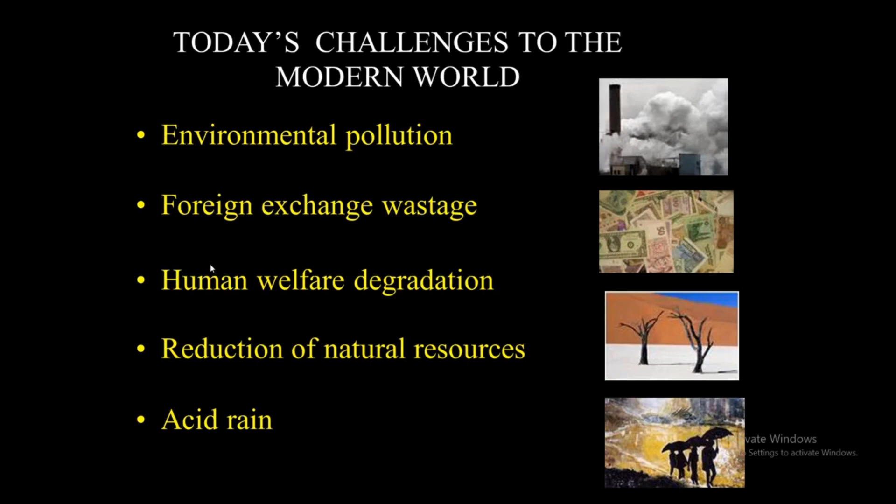Environmental pollution, foreign exchange wastage, human welfare degradation, reduction of natural resources, acid rain, energy deficiency, global warming, deforestation and desertification.

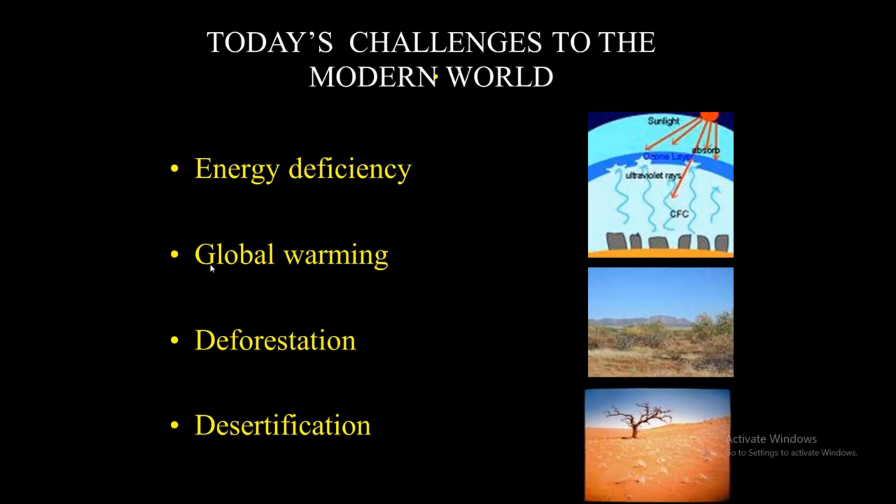One of the major challenges in front of us is energy deficiency. If any country wants to be in a developed position, it has to utilize as much energy as possible.

If we focus on the available energy resources, there are two sorts of energy sources: one is conventional energy resources, and another is new and renewable energy resources. Usage of conventional energy resources like petrol, coal and kerosene will yield loss of money as well as environmental pollution. Extracting coal, oil and gas is dangerous and polluting, and these fossil fuels are non-renewable.

As we use up easily accessible sources of coal, oil and gas, extracting them becomes harder, more expensive and more dangerous. Burning fossil fuels for both heating and fuel for vehicles is the main source of greenhouse gases like carbon dioxide and others, which affect the atmosphere and are altering the climate.

While the Paris Agreement marked significant recognition of the efforts needed to reduce global CO2 emissions to near pre-industrial temperatures, the UN Program Report 2019 remarks that greenhouse gas emissions will need to fall drastically by 7.6% each year until 2030 to meet the targets of the agreement.

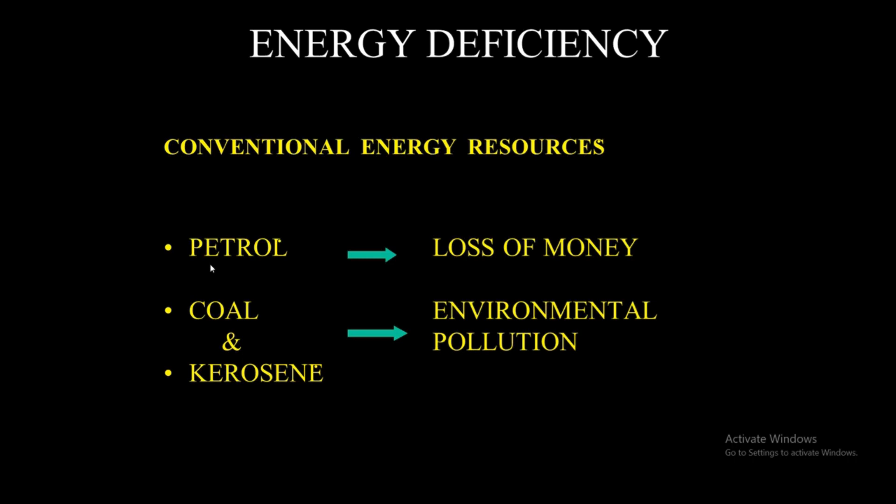Using renewable energy over fossil fuels has a number of advantages. Renewable energy technologies use resources straight from the environment to generate power. These energy sources include sunshine, wind, tides and biomass, to name some of the more popular options.

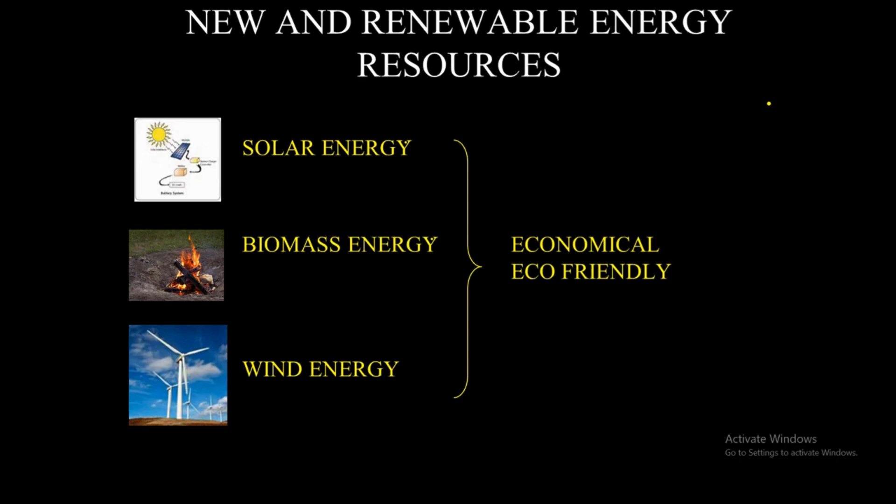Renewable resources won't run out, which cannot be said for many types of fossil fuels. As we use fossil fuel resources, they will become increasingly difficult to obtain, likely driving up both the cost and environmental impact of extraction. Renewables lower reliance on foreign energy resources.

Among these renewable energy sources, I am going to concentrate on bioenergy. What is bioenergy? The energy obtained from biomass is known as bioenergy or biomass energy.

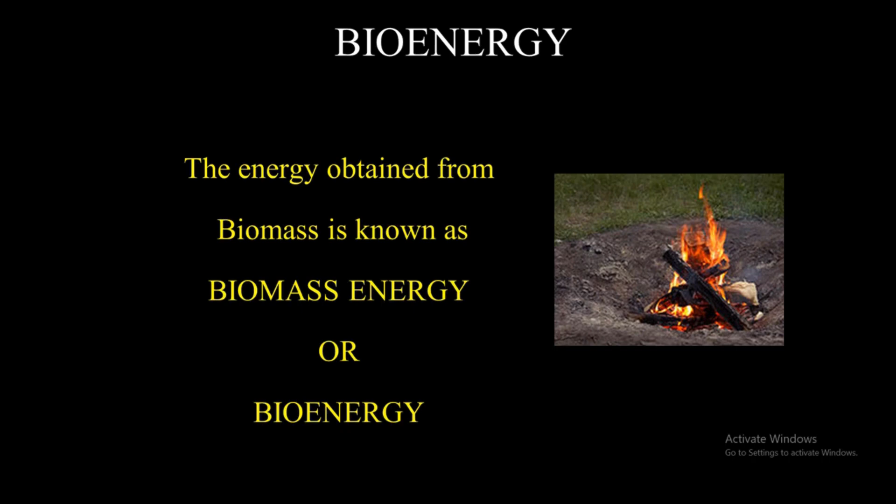Biomass is any organic matter, both living and dead, ranging from plants to organic waste. In most cases, biomass rich in oil or sugar is ideal for energy production. The term bioenergy refers to energy obtained from organisms, either living or dead. This does not include fossil fuels.

Now let us see the classification of biomass residues. Biomass residues can be categorized into 4 types: forestry biomass, agricultural biomass, energy crops, and municipal solid waste.

Forestry biomass can be categorized into 3 types: primary, secondary and tertiary. Trunks of fully grown trees fall under the category of primary forestry biomass.

Branches of big trees and trunks of small trees are under the category of secondary forestry biomass. The biomass derived after the processing of primary biomass is called tertiary forestry biomass.

The second category is agricultural biomass. Biomass from agricultural industries or agro-industrial residues are under the category of agricultural biomass, as well as dung of animals and poultry waste, which are also under this category.

Then we concentrate on the third biomass residue category, namely energy crops. Woody biomass producing species like bamboo, pine, switchgrass, etc., as well as starch producing species like root crops, etc., are all under the category of energy crops.

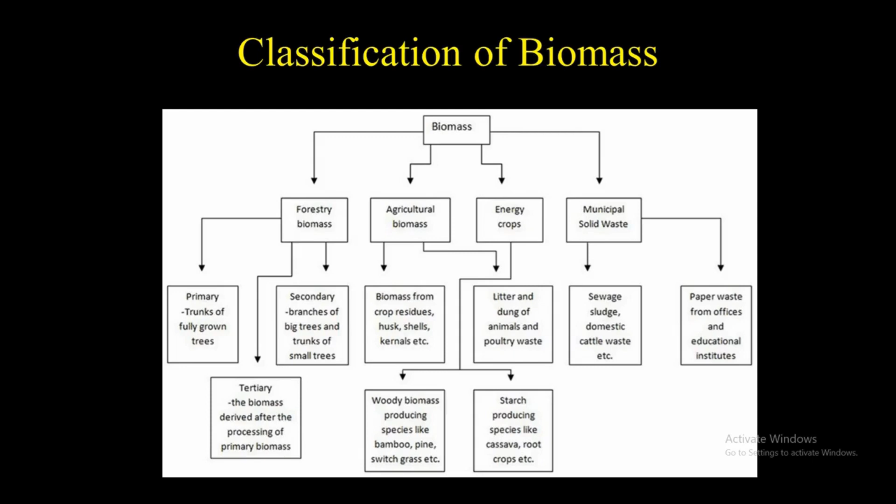Biomass contains stored energy from the sun. Plants absorb the sun's energy in a process called photosynthesis. When biomass is burnt, the chemical energy in biomass is released as heat. Biomass can be burnt directly or converted to liquid biofuels or biogas that can be burned as fuels.

These are the pictorial representations of woody biomass materials as well as agricultural and agro-industrial wastes.

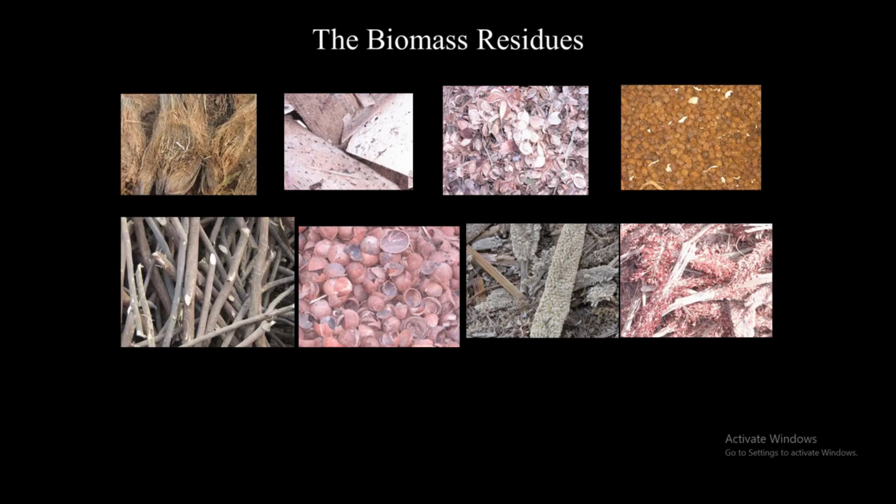Now let us see what is the technology behind converting this biomass residue into bioenergy. We have to utilize or adopt proper technology in order to use this biomass residue in an economical as well as environmentally friendly aspect.

As a physicist, we know the main law behind this technology is the law of energy conservation: energy can neither be created nor destroyed, but one sort of energy can be converted into another sort of energy. That is the main concept we are using in this technology. The available bioenergy can be converted into thermal, mechanical and then electrical energy.

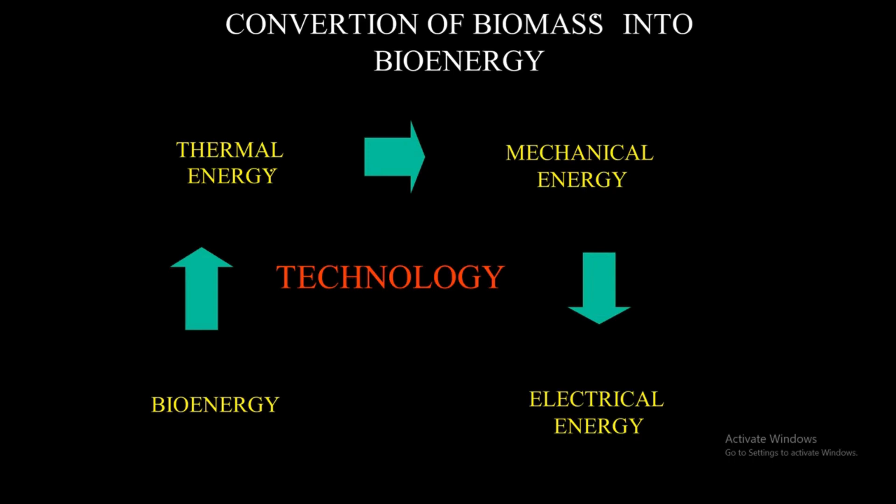The first step is we have to convert the biomass residues into bioenergy. The basic concept is biomass gasification, that is the conversion of solid fuels into a combustible gas mixture or producer gas.

For this we are in need of a gasifier unit, which is nothing but a closed container in which we put the biomass residues, and due to direct combustion, the available biomass energy is converted into bioenergy.

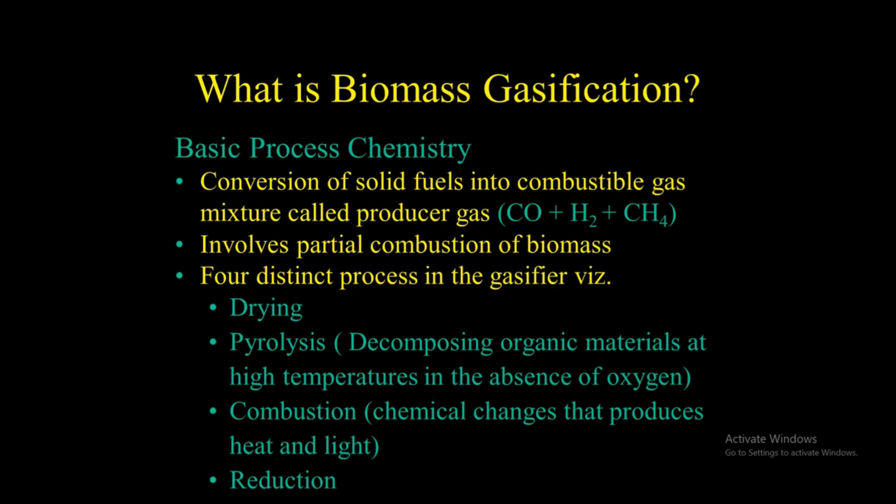This is the gasifier unit, which has four distinct zones. One is the drying zone, another is the pyrolysis zone, where decomposing of organic materials at high temperature in the absence of oxygen takes place, and the third zone is the combustion zone, where only chemical changes occur which produce heat and light. The fourth zone is named the reduction zone.

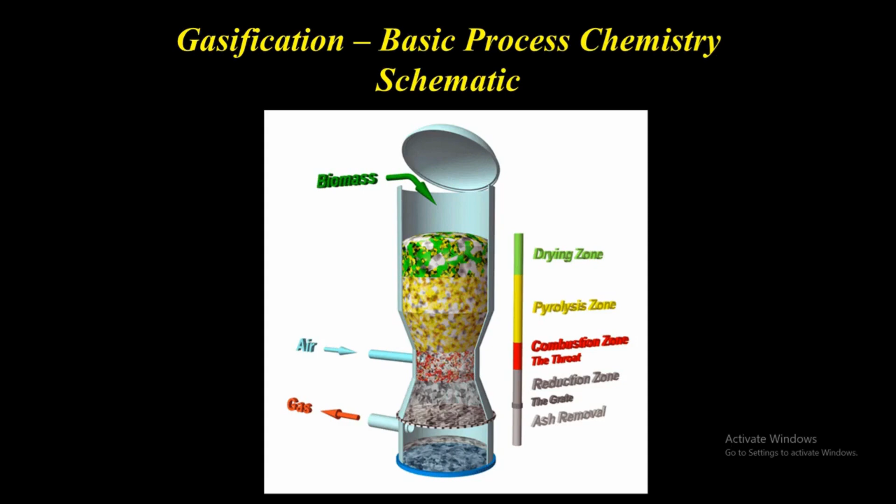What is biomass gasification? Biomass gasification means incomplete combustion of biomass resulting in production of combustible gases consisting of carbon monoxide, hydrogen, and traces of methane. This mixture is called producer gas.

Producer gas can be used to run internal combustion engines, which can be used as a substitute for furnace oil in direct heat applications, and can be used to produce, in an economically viable way, methanol, an extremely attractive chemical feedstock for industries.

Since any biomass material can undergo gasification, this process is much more attractive than ethanol production or biogas, where only selected biomass materials can produce the fuel.

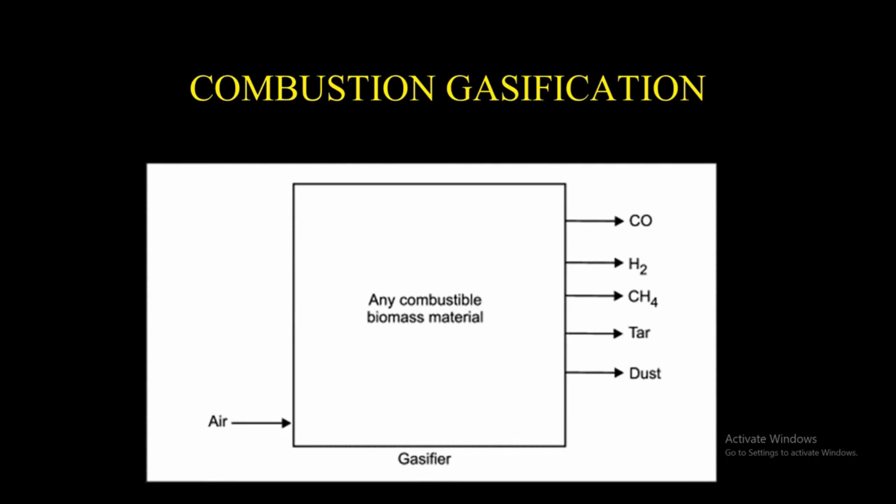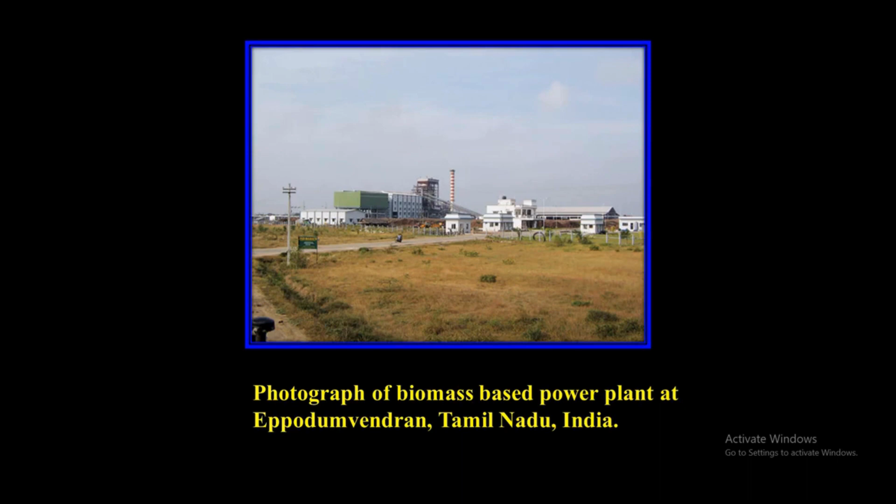Now we know the technological aspects. For implementation or application purposes, what are the main elements a biomass-based power plant needs in order to convert the energy?

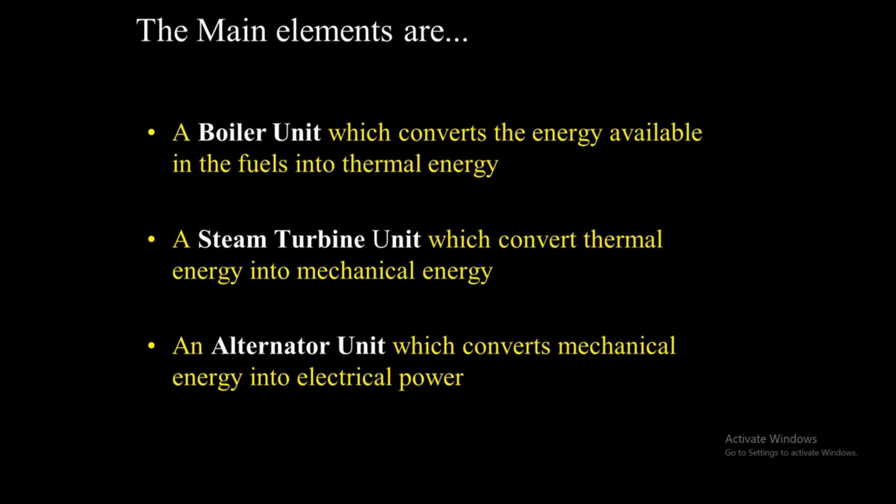Number one is the boiler unit, which converts the energy available in the fuel into thermal energy, which is nothing but a gasifier unit. The second is the steam turbine unit, which converts the available thermal energy into mechanical energy. The third is an alternator unit, which converts mechanical energy into electrical power. These are the three main elements needed in order to convert the available bioenergy into electrical energy.

Let us see one by one. The first unit is the boiler unit or gasifier unit. The boiler, named as a travelling grate combustion boiler, is where biomass residues are taken, and due to direct combustion the available energy in the solid fuel is converted into bioenergy. This combustion boiler can maintain temperature from 719 degrees Celsius to 900 degrees Celsius.

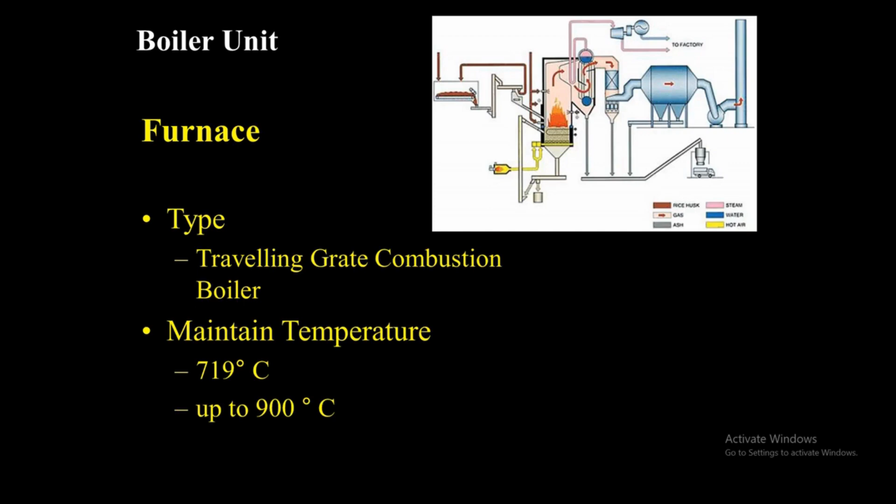The second unit is the steam turbine unit, which is placed above the boiler. We have to place this steam turbine above the biomass gasifier. Now what is the input for the steam turbine? It comes from the RO plant. Why are we concentrating on the RO plant? In order to keep the elements rust free, we are using the RO plant.

So the water from the RO plant is fed into the economizer, which is a sort of heater that increases the temperature of the input water up to 300 degrees Celsius. At that point the water becomes steam, and the steam is fed into the steam drum. This steam drum is placed above the boiler so that the temperature of the steam is further enhanced up to 500 degrees Celsius, and then it is fed into the turbine unit.

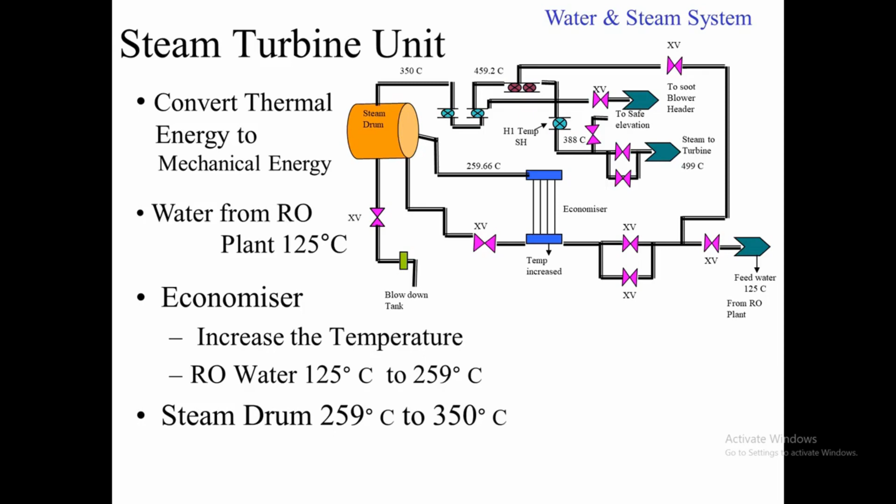Due to this high temperature, the pressure is enhanced so that the turbine rotates. Here the thermal energy is converted into mechanical energy. This is the turbo generator unit.

The inlet pressure of the turbine is 64 kilogram per centimeter square. The RPM (rotation per minute) of the turbine is 2984, which is fed into the alternator unit, that is the generator. Here the thermal mechanical energy is converted into electrical energy.

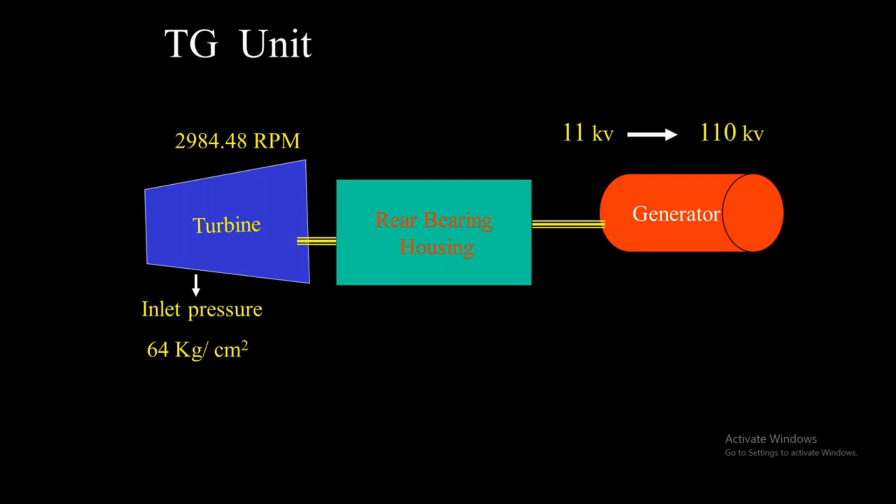Now the steam which is fed into the turbine causes the thermal energy to be converted into mechanical energy, and then using the alternator unit or generator, the mechanical energy is converted into electrical energy. The generated electrical energy is given to the Tamil Nadu Electricity Board. Thus, they are generating electricity from biomass residues.

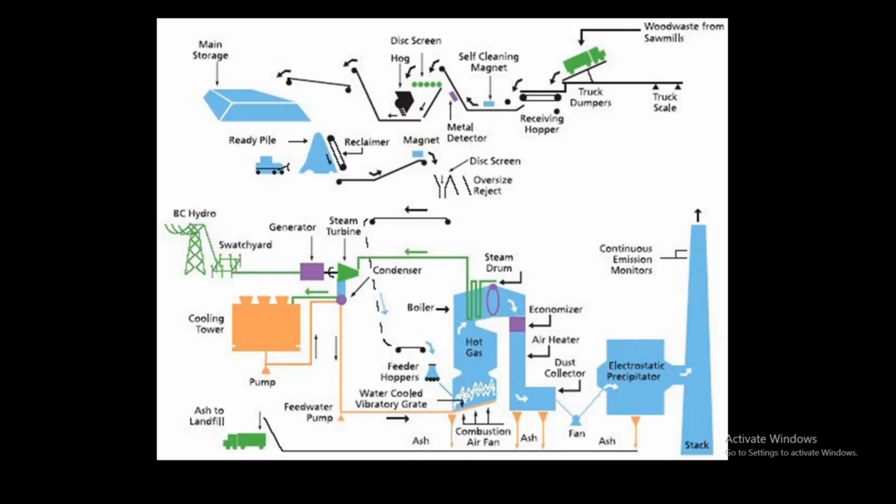Now let us focus on the economical aspects of power generation. The biomass based power plant, using 330 tons of biomass residues, generates 240 megawatts of electricity per day. That is, using 12 to 13 tons of biomass residues per hour, they generate 10 megawatts of electricity per hour, totaling 240 megawatts per day.

The production cost is rupees 2.30 per unit of electricity generation. They are giving it to the Tamil Nadu Electricity Board for 6 to 8 rupees. So overall, this sort of power generation is economical as well. Thus we have some information that using this technology we can generate electricity in both an environmentally friendly and economically friendly manner.

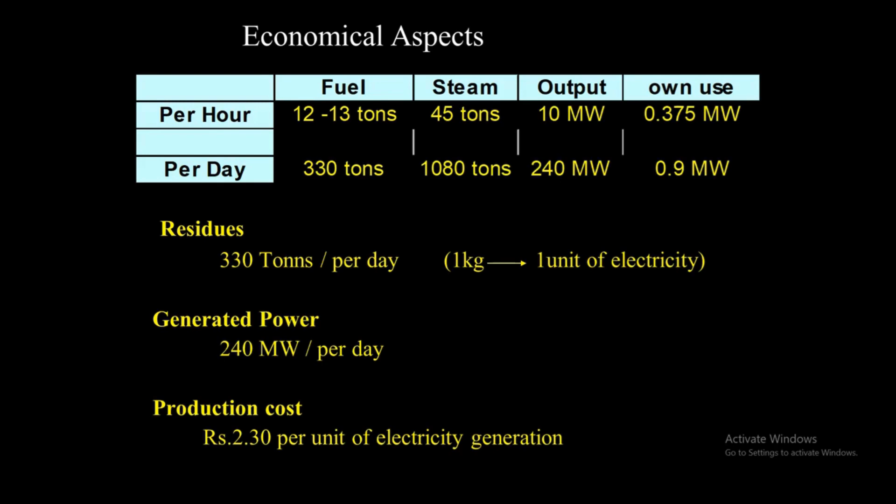Before using the biomass residues in the biomass based power plant, we have to do some sort of characterization like physicochemical properties analysis.

The fundamental techniques for thermal analysis are proximate analysis, calorific value analysis, and elemental analysis. In proximate analysis, we have to determine the moisture content, fixed carbon content, volatile matter, and ash content.

Moisture content is the determinant factor which will tell whether the material is ready to use or not, in order to achieve the expected efficiency. Calorific value is also one of the determinant factors, which gives the information of higher heating value.

The calorific value purely depends upon the volatile matter, that is the chemical composition present in the biomass residues. We have to concentrate on elements like carbon, hydrogen, and oxygen. Higher proportion of carbon content and lower proportion of oxygen content will yield more efficiency, and therefore we need to check the CHO content of the biomass residues.

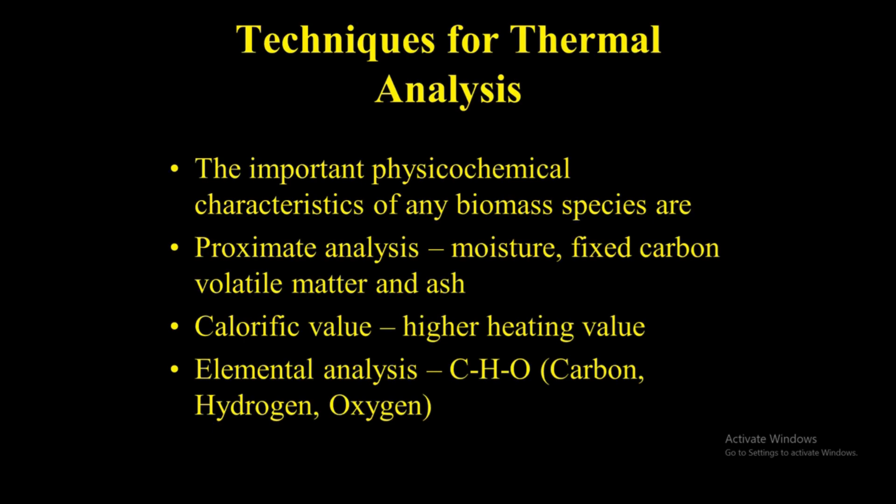So this is the fundamental lab characterization we have to do before using the biomass residues. To do proximate analysis, we are in need of a bomb calorimeter and hot air oven.

I have applied for a minor research project to UGC. They sanctioned 2 lakhs. Using this, I purchased the equipment and did the proximate analysis using woody materials.

The table shows that these materials have less than 10% moisture content and high volatility, nearest to 75%.

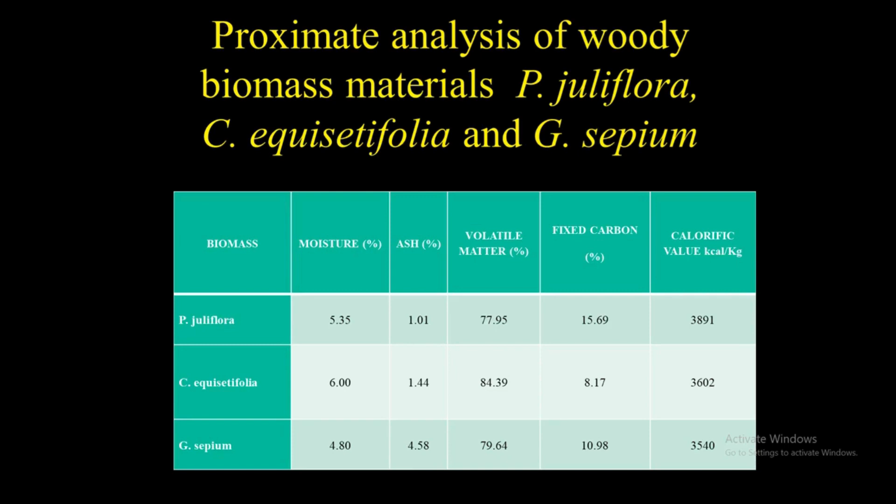The calorific value of these 3 materials is nearest to 4000 kilocalories, which is the determinant factor for thermal efficiency. Now the biomass residues are ready with the expected characteristics, and now we have to use them.

For that, we have created a lab, namely the biomass gasifier lab for electric power generation, sponsored by DST-FIST. Using this biomass gasifier, we are generating 5 kilowatt per hour electricity, using the biomass residues available inside the campus.

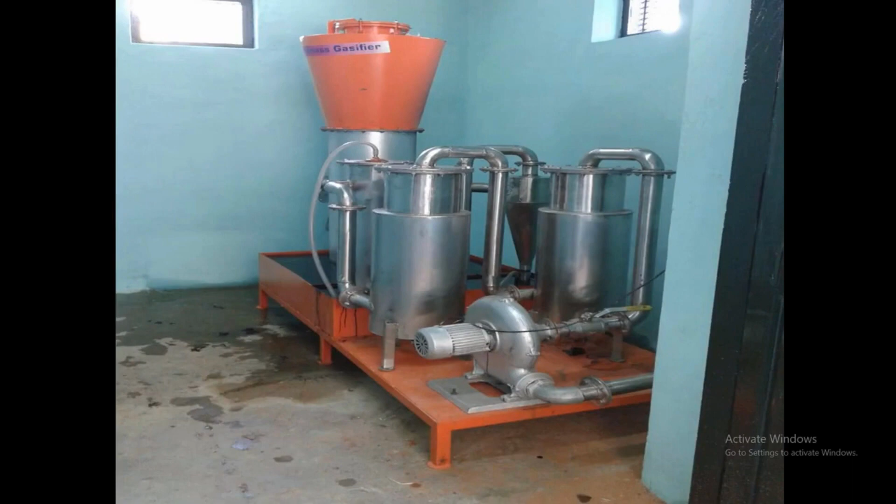This is the 5 kilowatt biomass gasifier unit. This is the biomass gasifier, shown in orange color. In the lower part, we directly combust the biomass residues.

Due to direct combustion, the available solid fuel energy is converted into bioenergy, which is fed into 4 filters. Using these 4 filters, we can produce the producer gas without any pollutant, and then it is given to the generator, where using the alternator unit, the mechanical energy is converted into electrical energy.

So this is the 5 kilowatt biomass gasifier unit, which is sponsored by DST-FIST. The generated electricity is used for our lab. This is our UG lab which is running with bioenergy.

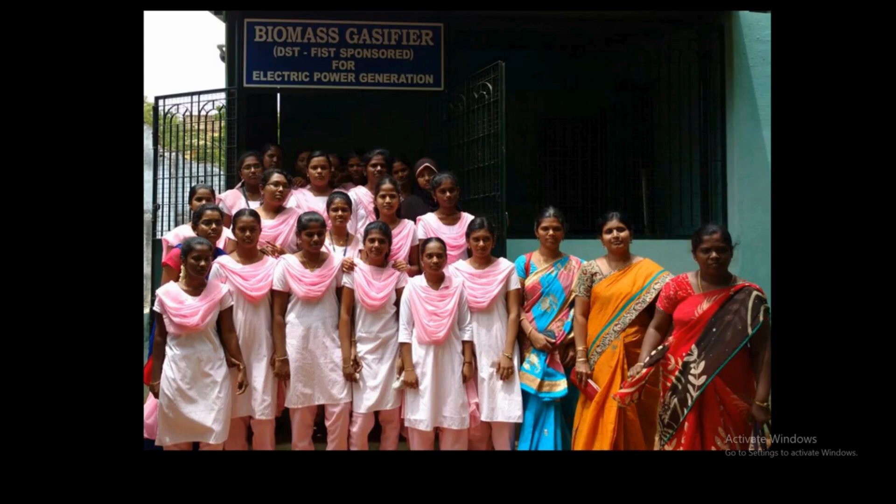Our contribution to society is utilizing the biomass residues available in our campus. We are generating 5 kilowatt per hour of electricity, and the generated electricity is utilized in our lab. We also invite our neighborhood colleges to visit our lab, thus creating awareness of renewable energy resources.

For creating awareness of utilization of renewable energy resources among nearby institutions, the Foundation for Education Excellence agency awarded us the Best Renewable Energy Institute Award.

Let me conclude this topic in this manner. Every type of energy generation or utilization process affects the environment to some extent, either directly or indirectly.

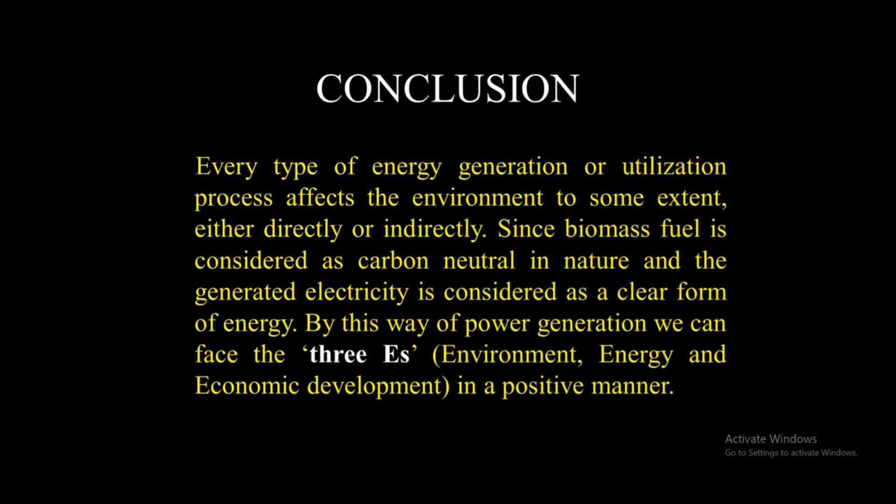Since biomass fuel is considered carbon neutral in nature and the generated electricity is considered a clean form of energy, by this way of power generation, we can address the three E's - environment, energy and economic development - in a positive manner.